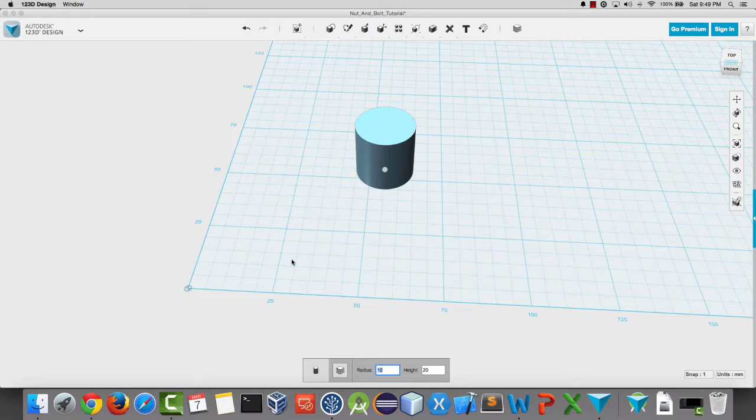Anyway, let's go ahead and get started. First thing we do, we go up to our primitives menu, we grab a cylinder, we bring it down, and we're going to set the radius to 4, and we're going to leave the height at 20. Radius just sets the thickness of the bolt, so we'll go ahead and put him down there.

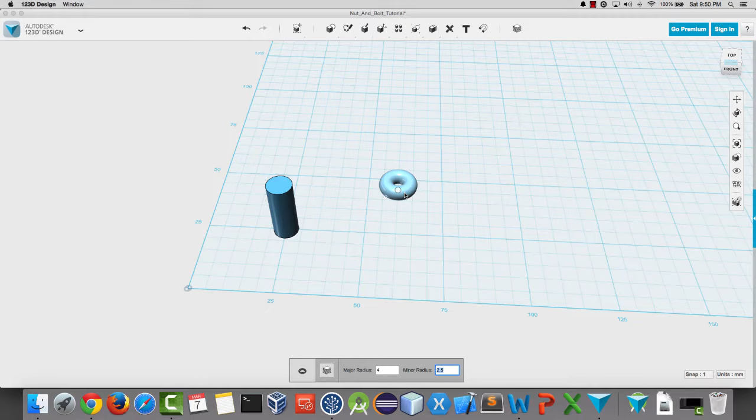Then we go back up to our primitives menu and grab a torus. For the torus, the major radius needs to be the same as the radius for the cylinder, so in this case it's going to be 4. And then the minor radius, which is used to control the thickness of the threads, we're going to set that to 2.5, which is a value that I've used pretty frequently when making these for different things.

So once we have all that set, we're going to place this torus on top of the cylinder, centered on top of the cylinder. So once we put that down, we'll go ahead and select the torus and press D, and that will drop it down to the XY plane, setting its Z coordinate to 0.

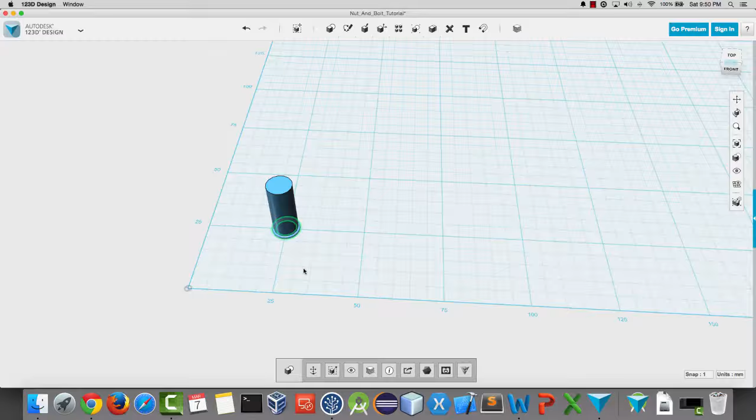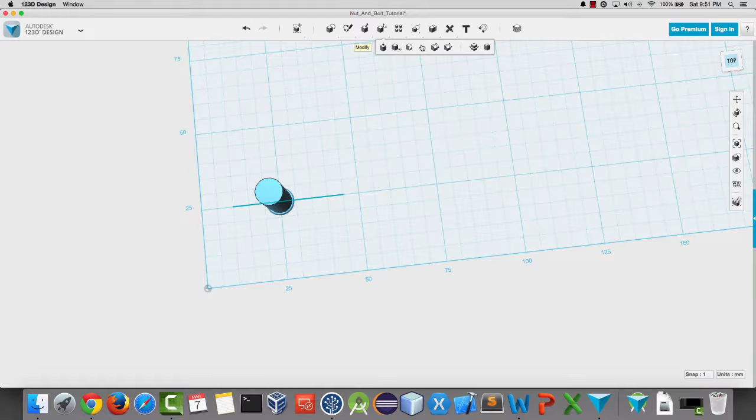So now that we have that in place, we need to draw a polyline, and we're going to draw this line to just cut the torus in half. So we're going to draw it exactly through the center. We've got our line. Now we want to use that line to split the torus in half. So we're going to go up to the modify menu and scroll over to split solid.

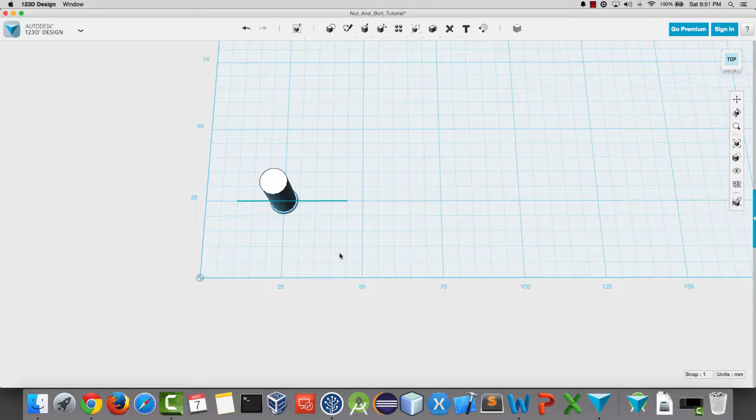We are going to select the torus and then come up here, change the selection to split entity, and we're going to select that line we just drew. Now you can see it's going to split that torus in half based on where that line is. So we're going to hit enter, and there we go. We can get rid of that line. And if you scroll in, you can see that it is actually split in half.

So now we're going to move these halves of the torus around a little bit. So we're going to select the first half, select move. Then you're going to grab the X angle knob, and you're going to set that to be typically a relatively small number. In this case, we're going to choose 6. So it's going to slant it 6 degrees, and then we're going to select the other half of the torus.

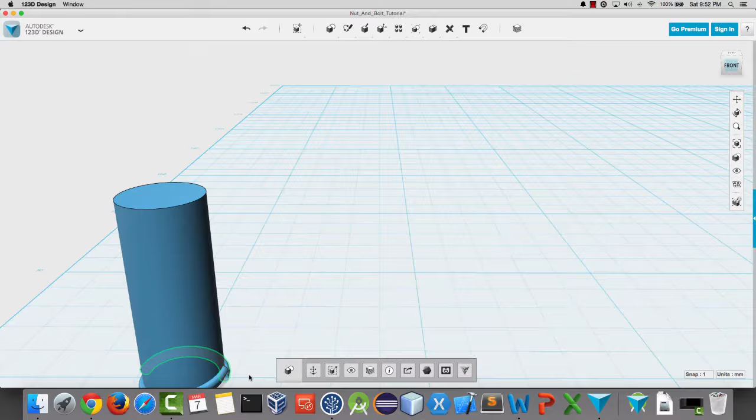We're going to click move. We're going to use the same X angle knob, and we're going to put -6. Whatever number you put in, it needs to be the negative of whatever you set the other to be. So you hit enter, and now you can see they're a little out of line.

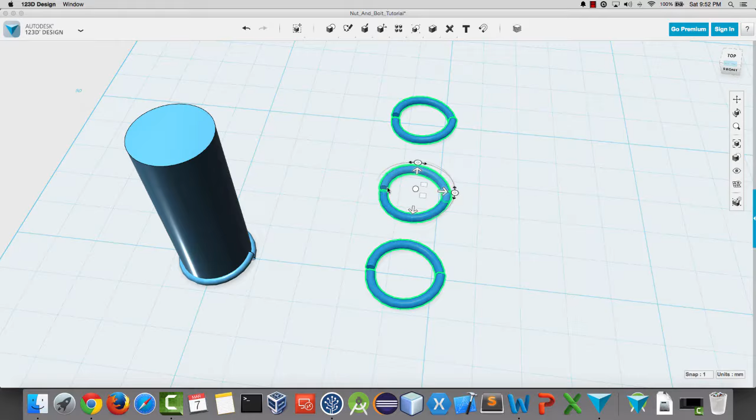So we select both halves of the torus. We're just going to make some copies. So you Control C, Control V, or Command C, Command V if you're on a Mac like I am. So we make 1 copy, 2 copies, 3, and I know this would probably be faster with something like the pattern tool up here, but I've kind of committed to doing it this way, so that's what we're going to go with. Alright, so I think one more set will do us.

There we go, so that should be enough. Now that we have all of the pieces of the thread that we're going to need, we start putting the thread together. So what we're going to do is we're going to use the snap tool to start snapping this thread together.

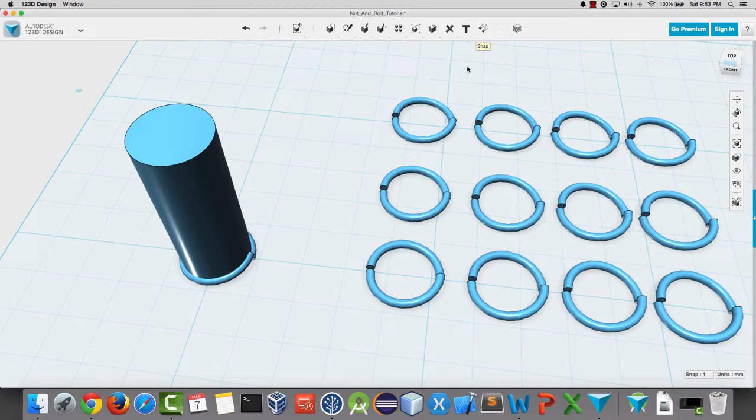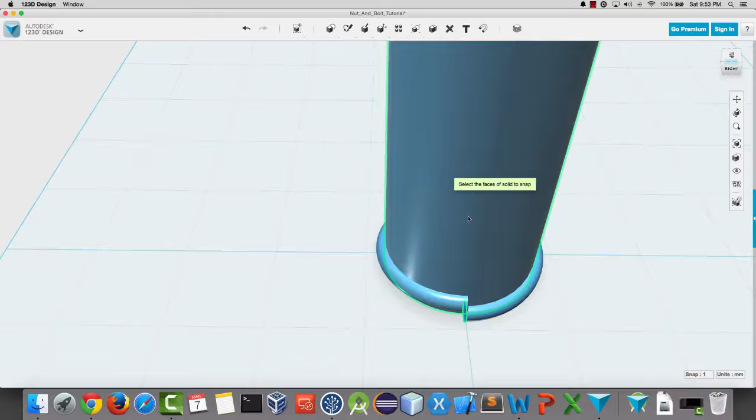So you click the snap tool, and we're going to click the face of this guy, and we're going to try to position our camera better. Ooh, what's happening? Okay, that was rough. Let's see if we can't get a better vantage point here.

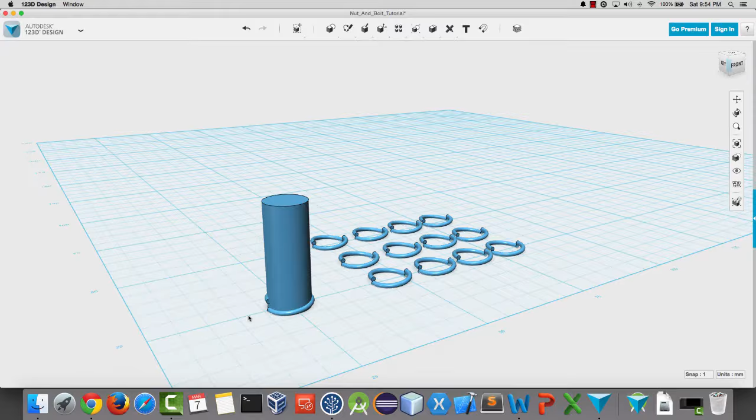There we go, and we're going to select the other face that it got out of line with. So we do that, and you can see, let's go back home. You can see over here that the threads are going up like you would expect threads on a bolt to go. So now we are going to just continue snapping.

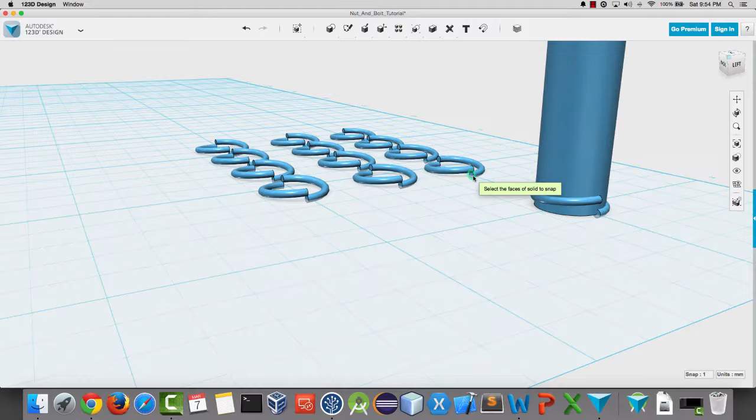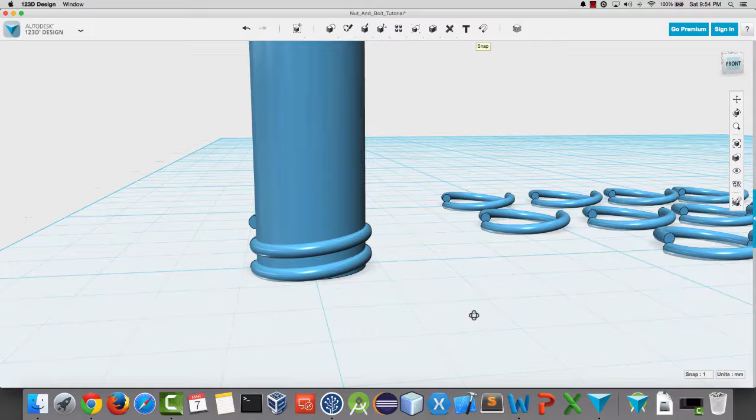So what you're going to want to do is use the snap tool. You're going to click whatever face of one of these copies would match up with the face not attached to any threading. So you click here, and then you click here. There you go, and you just keep doing that, just like this. I'll do a few pieces, but this is rather tedious, and there's probably a faster way to do it, but if there is, I'm not thinking of it right now, so we're just going to go with this.

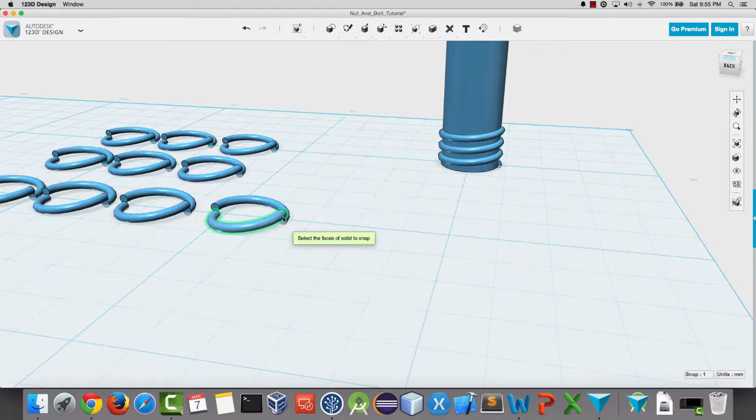So just keep on snapping, and I think by this time everybody kind of gets the point, so I'll probably speed this up or cut it out altogether so that it does not bore you, and we'll come back when the threading has run up all the way to the top of the bolt. So we will be right back.

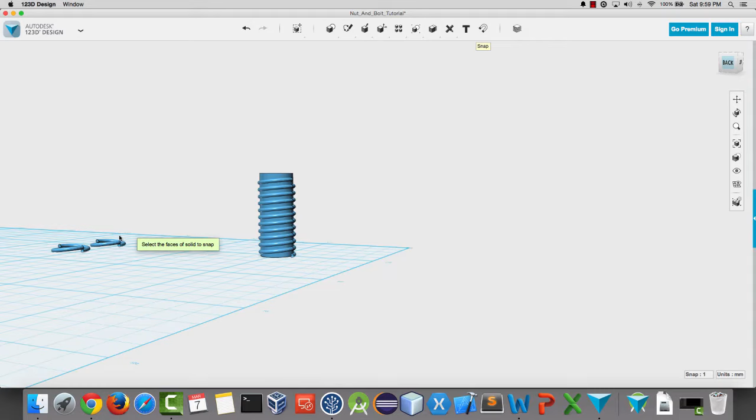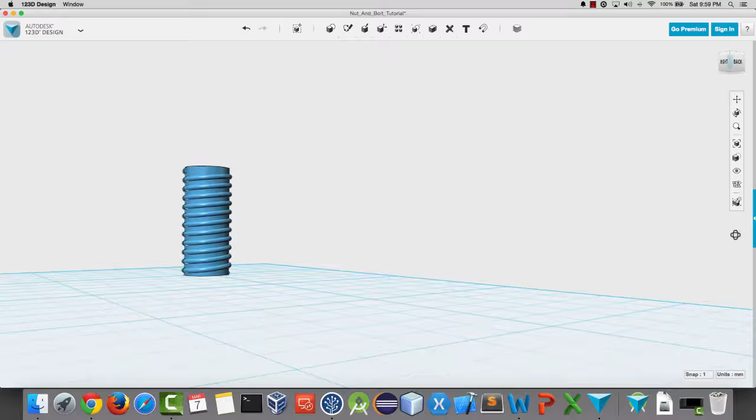Okay, so we're back, and we're just about at the top. I just wanted to come back to kind of explain. I like to put the threading all the way up past the top of the cylinder, and that's pretty much just to make the threading come up and run into the head of the bolt. It's really kind of a preference - you don't have to do it, but I do. And I guess if I were advising someone else, I would probably tell them to do it as well if that's what they needed.

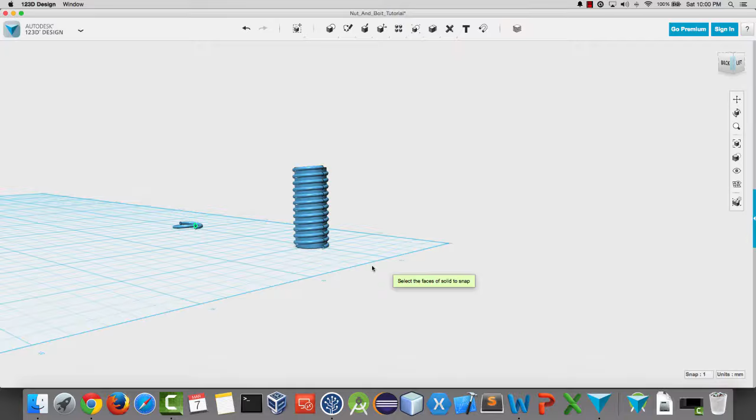So now, wow, we had just enough threading. So now one thing I would like to do is just snap one more piece to the bottom right here. There we go, and I guess we can go ahead and delete him.

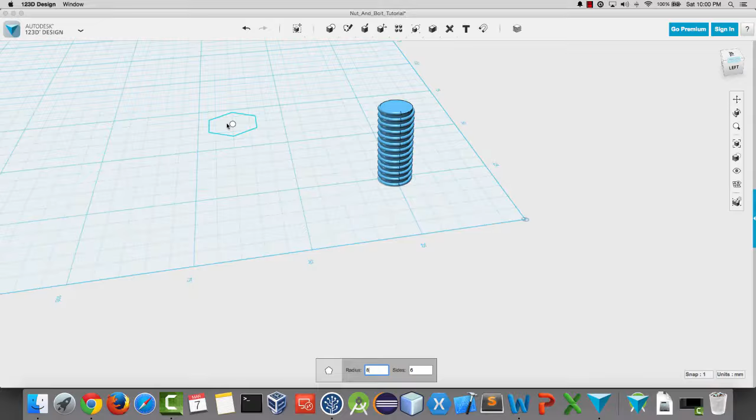So now what we need to do is we need to create a polygon. So we'll come over here, go to polygon. For sides, we're going to choose 6, so that if you make this a size that can fit into a particular size socket, it'll work out for you. We're going to put the radius of the polygon at 8, just kind of arbitrarily picking that. Also do believe it is a standard socket size - I can't remember which one, but I think it will fit. Anyway, so we're gonna go ahead and place him down.

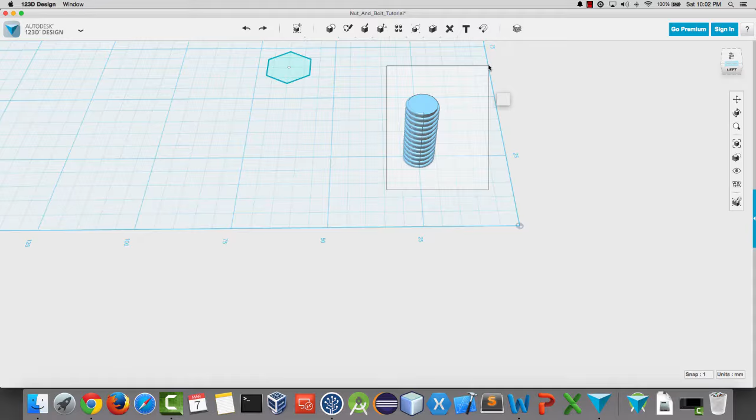Okay, now that we have our polygon, what we're going to do is create a copy of this. So we're gonna make this copy. We're going to drag him over here.

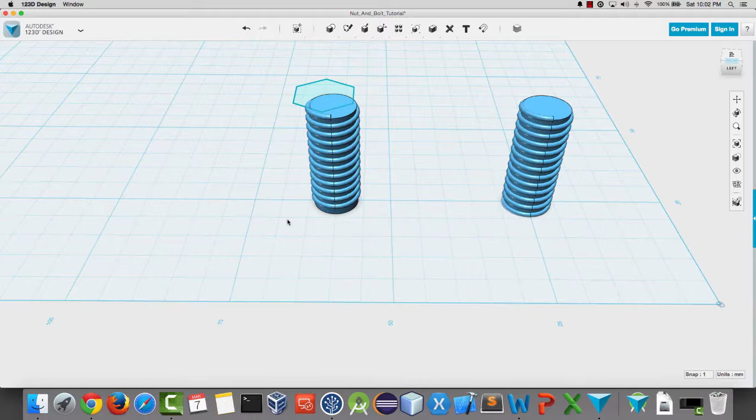Okay, now what I'm going to do is I'm actually going to select these bottom pieces of threading, and I'm just going to make them individual pieces, and I'm actually going to delete the bottom 2 pieces on this guy. And then I'm going to select the whole thing, I'm going to scale it. So this bolt that we've copied and taken the bottom threads off of is actually going to be the piece that we use to make the nut.

Since my goal was to 3D print these, making it the exact same size as the actual bolt is never going to work - it might be inaccuracies of the printer, that's actually exactly what it is, I'm pretty sure. But either way, you're going to want to scale the object as a whole to be larger. So you hit scale, and this is just sheer experience from experimenting with this, but I've found that 1.09 as the scale factor works really well.

Not too tight, not too loose. If it comes out kind of loose, you can actually knock that up to 1.1 and it gets a fair bit tighter. I can't tighten them by hand, I have to get a tool. So if you've used the appropriate size polygon to get something that fits into a socket, it's a lot easier to work those together. My preference is 1.09.

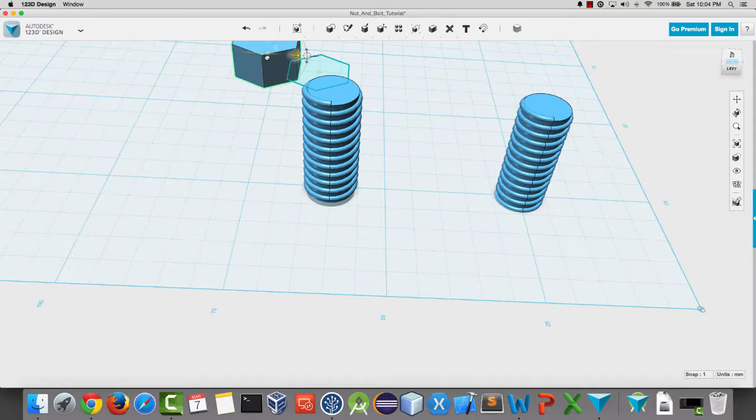So there we go, we've scaled him to be larger. Now we want to go ahead and extrude the piece for our nut. The nut is going to have a height of 8. That's again kind of arbitrary, that's the size I typically make them. They just have a good size to them, but that's completely subjective. You can make it any size you want, you just want it to be thick enough to be kind of durable.

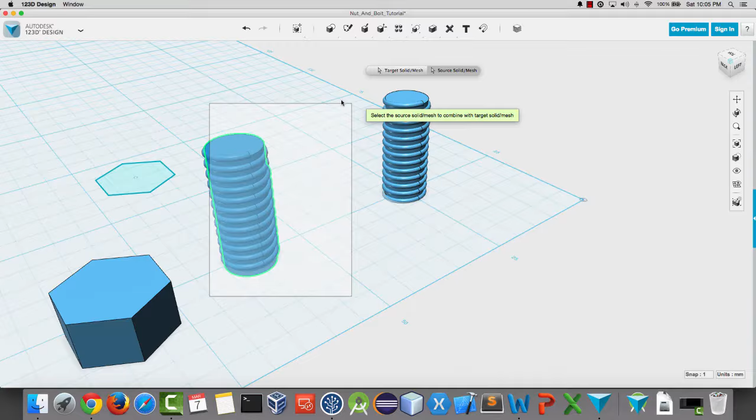So now we are going to merge this into one object so that we don't only move some of it. Okay, I messed that up, let's try that one more time. Gonna merge him. Okay, third time's the charm. So now we're gonna merge this together.

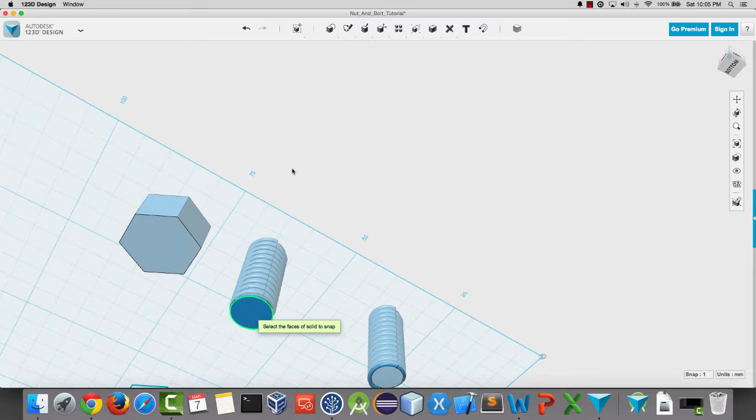Let's go ahead and select all the pieces. There we go, perfect. So the reason I removed the bottom threading off of these is so that once I merge it all together and click snap, and snap the bottom of this thread to the nut, it would be centered on the nut. I've actually just started doing that, because if you run the threading all the way down to the bottom and combine them all into one object, it will not be exactly centered on the nut. So that wasn't really even an issue, it was more of a cosmetic thing that bothered me.

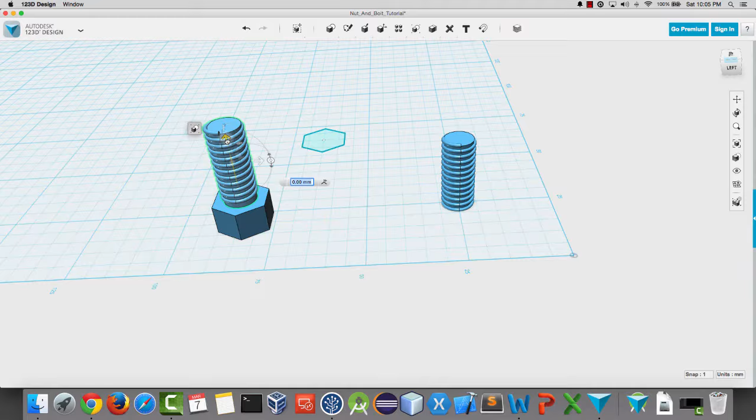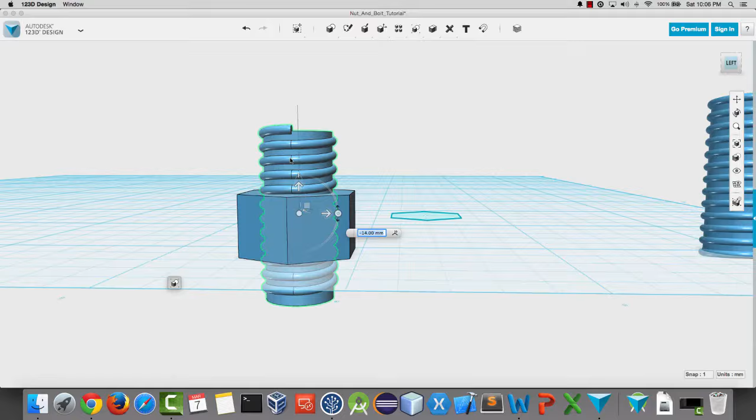So now we're going to take the nut and slide him completely through the bolt. The only thing you want to make sure of when making the nut is that the threading runs all the way through the nut polygon. You want to make sure it runs all the way through. You don't want to stop at the section where we removed threading, you want there to be threading barreled all the way through the nut.

So we've moved him, we're going to do a subtract operation up here in the combine menu. So we got to subtract. First you click the nut, then you click the bolt thread, and there you go. There is our nut.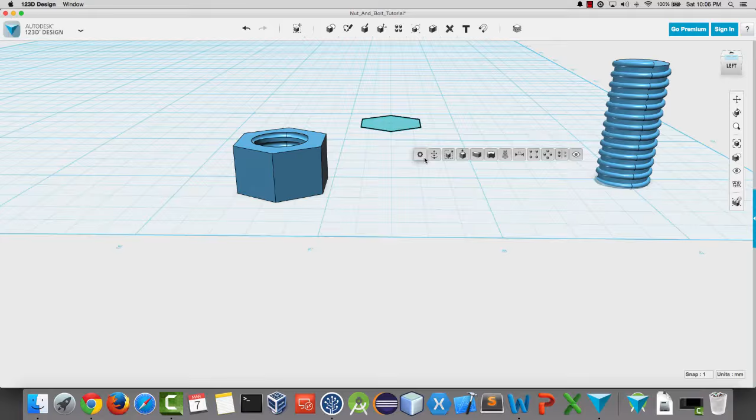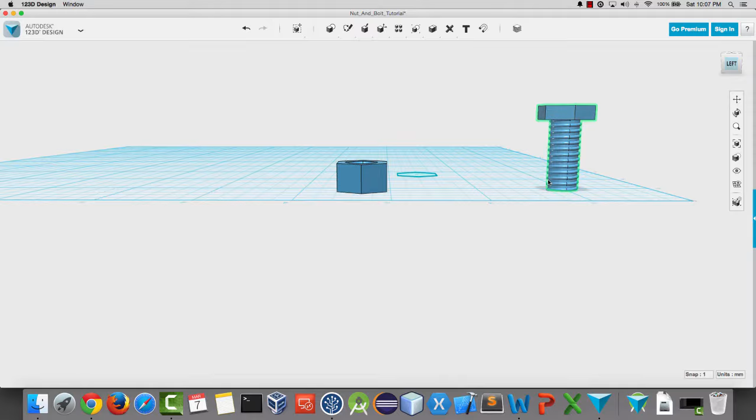So now we really only have two more things to do. We have to make the bolt head, and we'll go ahead and make that a polygon. We'll raise it out of our existing polygon sketch with a size of 4. Then we'll use the snap tool to snap him onto the top of that cylinder. And then what we'll do is we'll make one more. Let's readjust our camera. So then we will extrude one more arbitrarily sized piece.

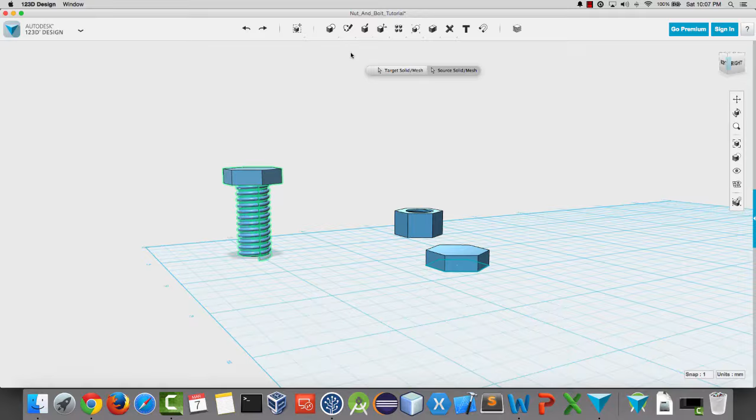So now what we're going to do instead is merge this all into one piece. There we go, so now that's all one solid piece. We're going to snap him to the bottom, and then what we're going to do, take the subtract tool again from the combine menu. We're going to subtract the whole bolt from this polygon, and what that's going to do is make our threads run all the way flush all the way down to the bottom.

So there we go, we've got our nut, we've got our bolt, and what I'll actually do is go ahead and send these over to my 3D printer. So I'll go ahead and shoot a real quick clip taking them off the bed, screwing them together, taking them off. If you're going to 3D print this, the only real consideration, and this is probably obvious, but you want to print this so that the top of the bolt is actually on the bed of the printer.

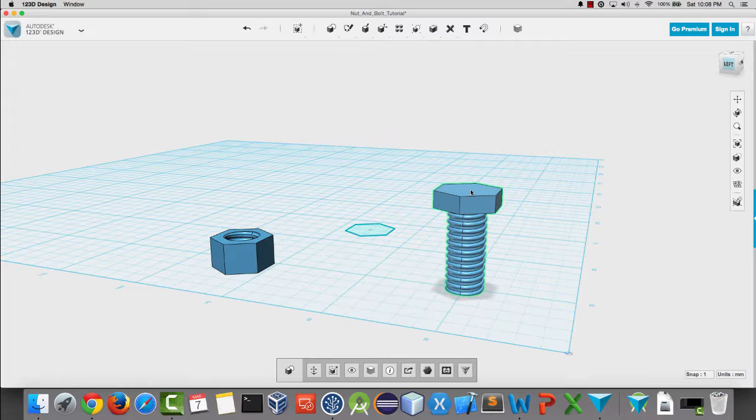Pulling one of these right here, just one more, there we go. So you just want that to be like that.

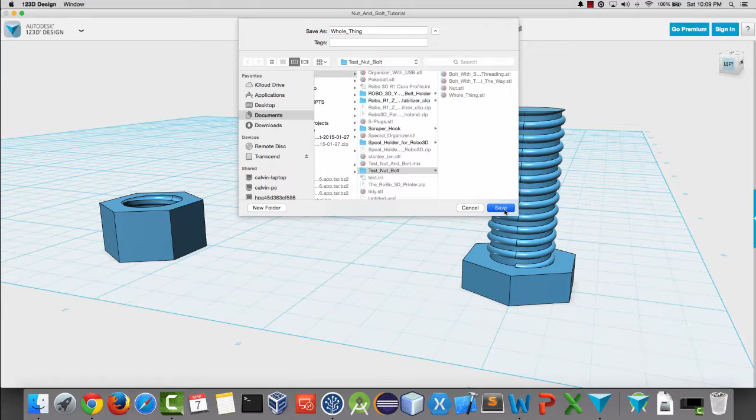In case anyone's interested, to export this out, we'll just go export to STL, hit OK, then you navigate to wherever you put your files. You can see I kind of already did this before, but we'll go ahead and overwrite this file called whole thing, because it's going to export an STL of both the nut and the bolt. So we will go ahead and write that out. We'll delete these files to make sure that we're using the ones that we just created.

You open the STL. Mine opens in Meshmixer, that's the only thing I really used to do this, so that's the only one. I'm not sure how to do this in other programs, but you can see in the object browser we have two objects, the bolt and the nut. Whichever one of these is highlighted, if you click export, it's going to export that object singularly.

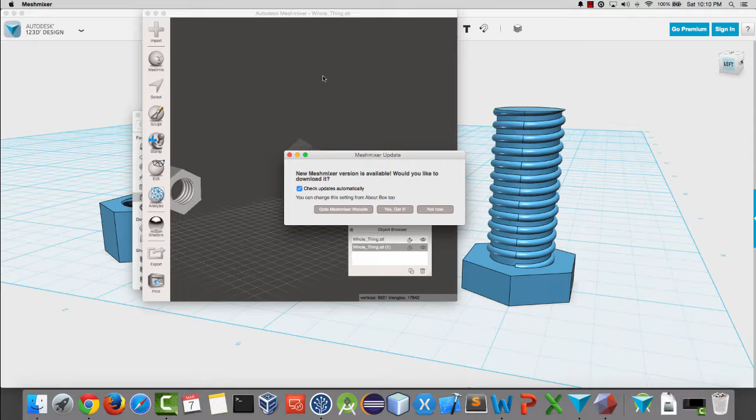So if we go back to our folder, we can type in nut, so now we actually have the STL for the nut in its own file. We can go to the bolt, do the same thing, highlight the bolt, and we'll call this bolt. We'll save it, and there we go. We have our STL files that we can run to the 3D printer.

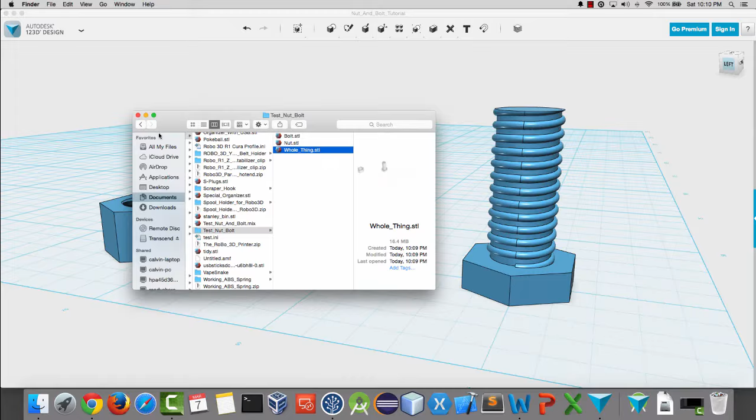So I will go ahead and set those to print, and we'll show you how it goes.

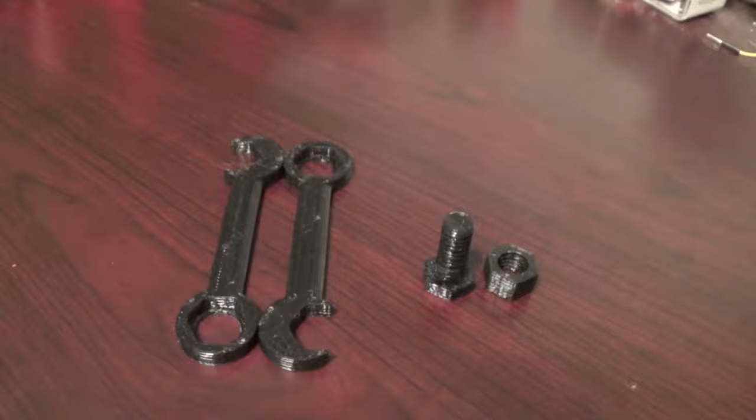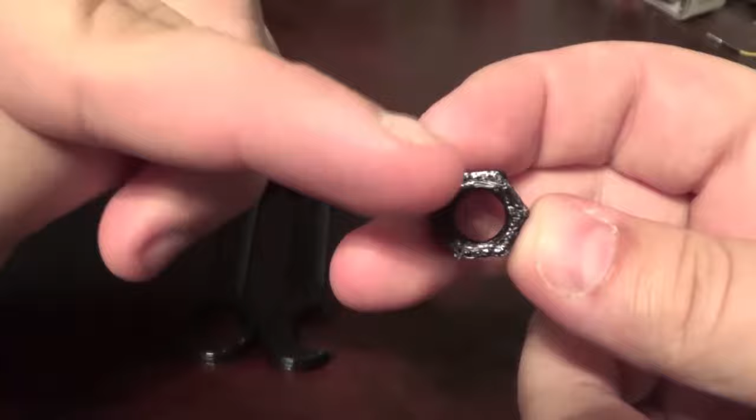So here's our nut and bolt off the 3D printer. I cleaned them up just a little bit. There were some strings inside this nut, but they were easy enough just to scrape out. And honestly, you don't even need to. You can just put the nut and bolt together and it will remove any kind of burrs or anything like that inside the part.

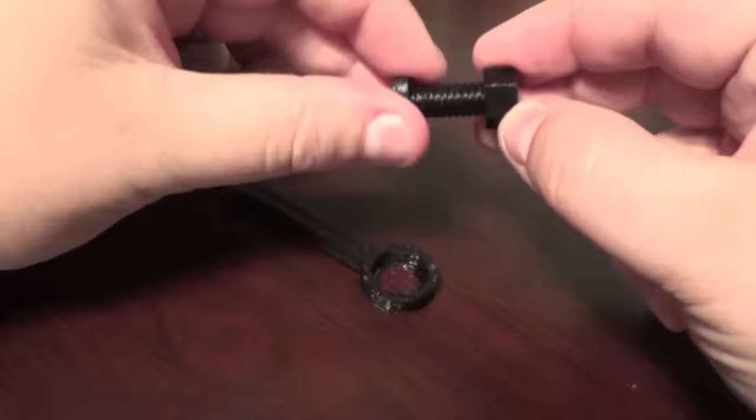So I also made and printed these because these things can actually be pretty hard to put together by hand. I can make another video if there's interest on how I made this. It's actually super simple, but I just wanted them to help me put them together and take them apart, because the first time you put these together, they're likely to be kind of difficult. Well, not even really getting it started per se, but once you get a bit down the shaft of the bolt, it can be pretty difficult.

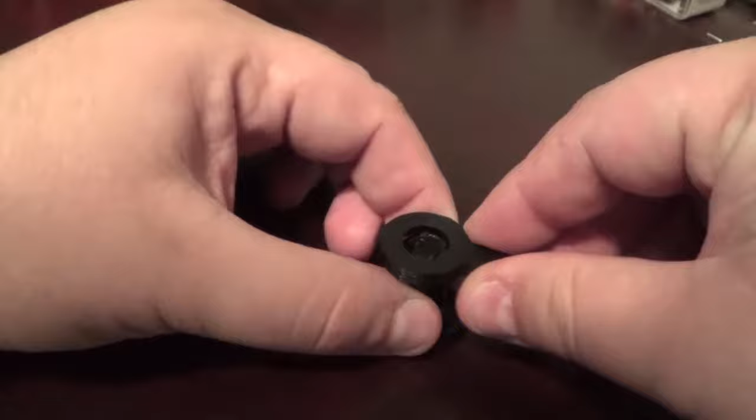So I just made these to help out, and you can see, here we go, if I can get that lined up, there we go. So we can just turn this guy underneath, you can see the bolt rising out of the hole in the top of the wrench that I made. And I actually made it so that they weren't just a polygon all the way through, so that it would catch it and I could do this easily without having to worry about the bolt slipping all the way through the wrench.

So anyway, there really isn't a whole lot of resistance when using these, but if I was doing this by hand, I imagine it'd be pretty tight. So here we are completely together. It's all the way together, and you're probably not gonna be able to take that apart by hand. I just tried pretty hard. I'm gonna try again. Yeah, they're together pretty good.

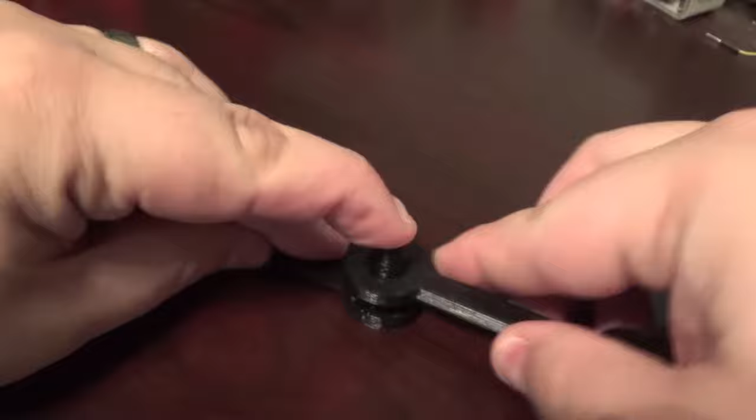So we can use the tool and lefty loosey. Let's see, left. Nope, that's right, left. Nope, oops. Let's try that. There we go. Got to break it loose because I tightened it up a good bit. But so there you go, nut and bolt.

It works. I've used them to hang things that I've also 3D printed, and I gotta say they're tough. When they're even partially tightened down with the scaling, we had set it 1.09 on the clearance inside the nut. There's no play. Now you can do it at this point by hand, but there's no wiggle. You can't just pull that apart or anything. It was really together.

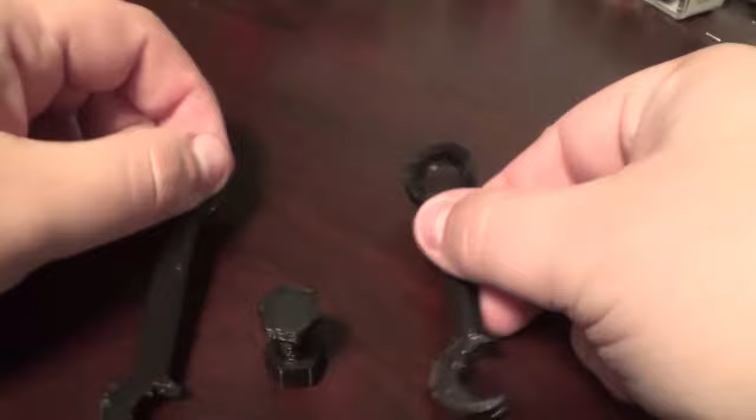So yeah, I've found a lot of uses for these, and these are really cool and easy to make. Like I said, if there's any interest, let me know. I'll make a video on how I made it. It's actually very easy. If you can't figure it out just by looking at them, I would make a video for it. Anyway, hope you guys enjoyed it, and I hope it's helpful. Thank you.